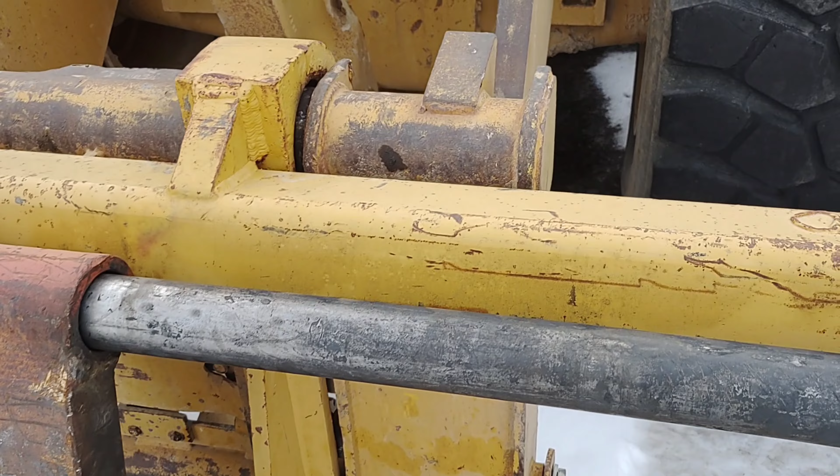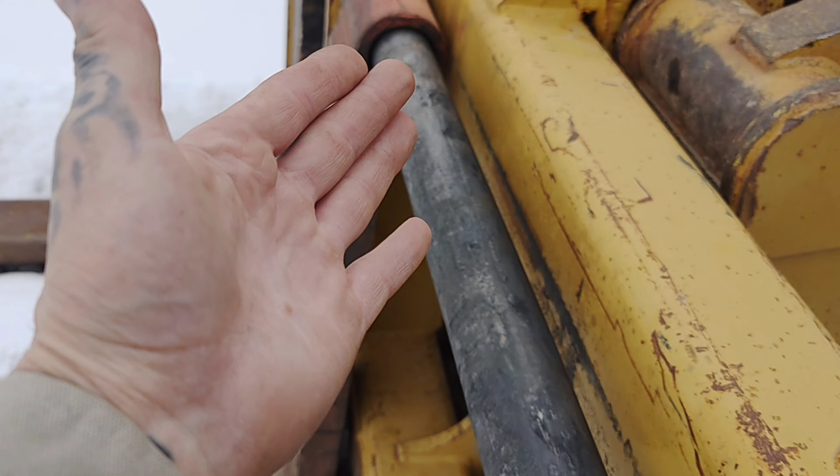Alright, next build up. We're going to do some forks like this, for something like this. So we're going to have to build ourselves a little notch like this - a bracket, cradle, something like this. Something that goes down like this and has locking pins in it.

So I'm just over here to get a good idea on this piece of equipment, to see how I'm going to build it. It's massive. Just trying to capture it all. This is how I need to build it.

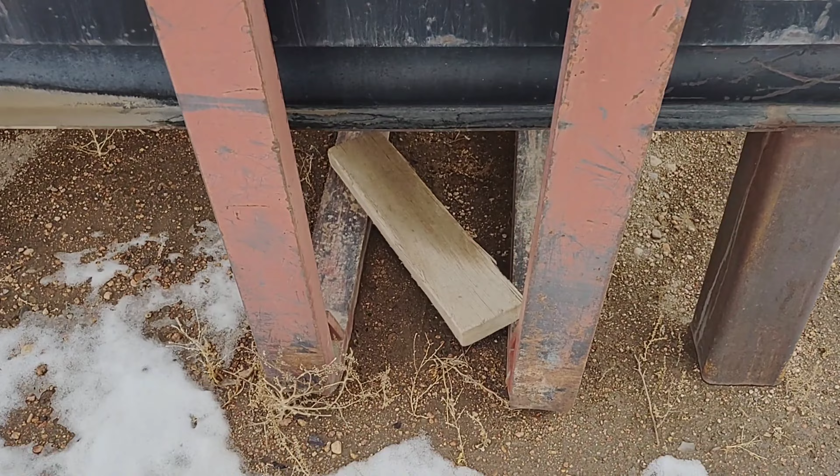Just like this. Alright, so we were going to do these big forks. We decided not to, because these are kind of made for going on a really tall bucket with a blade - I mean with a bucket, duh. But so I'm just going to steal this bar.

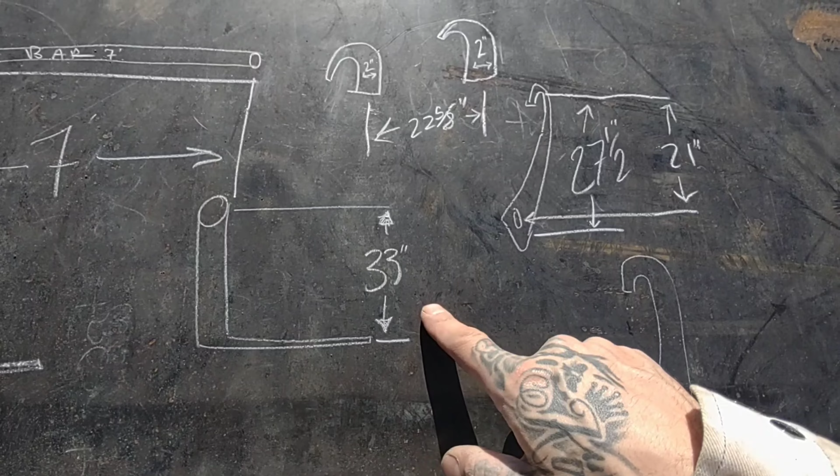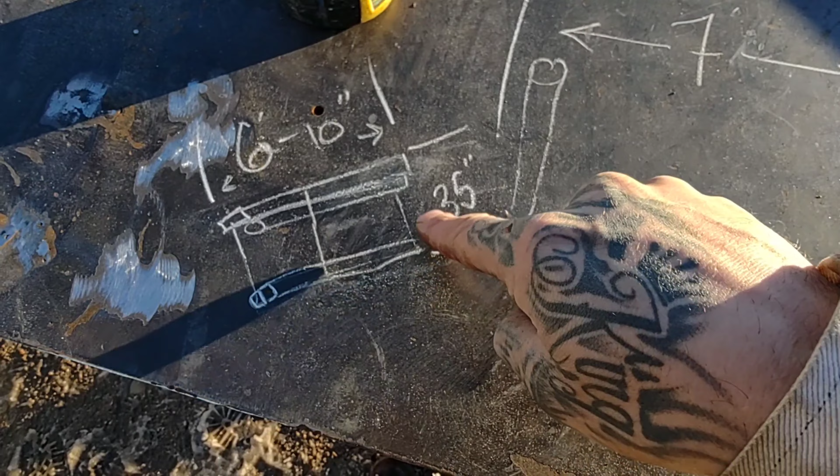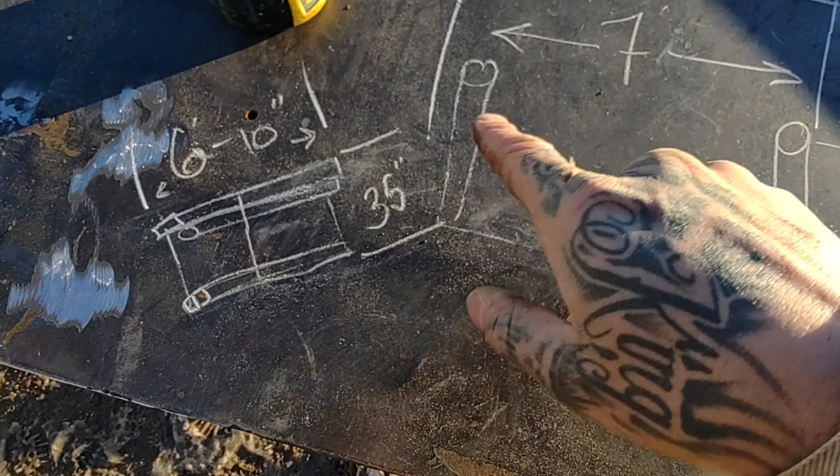Okay, so now I'm figuring out some stuff for my forks here. So I'm figuring out the actual frame that it goes into. So that'll be a square tube, and I'll have plates on the side, plate in the middle, and I'll have the forks inside of there, so that way they can slide all the way to that point. And I'll make it just under 7 foot, so that way I can get my tighteners on the outside of that bar sticking through them.

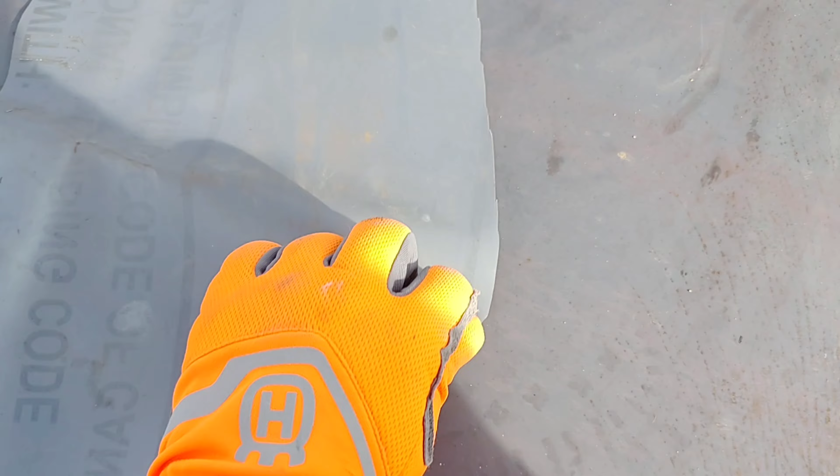And like I said, these will be plates, that'll be a plate, and then I made a custom template - so here was my template I had made, but it was just kind of to get me in the ballpark. So that's what the piece is gonna look like.

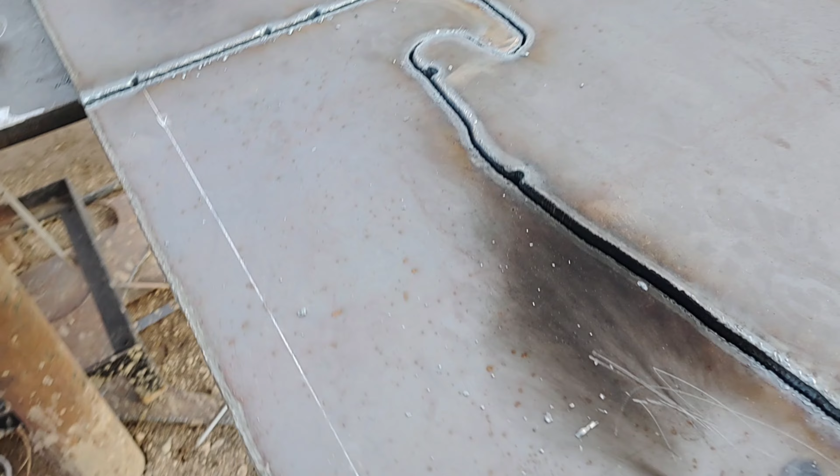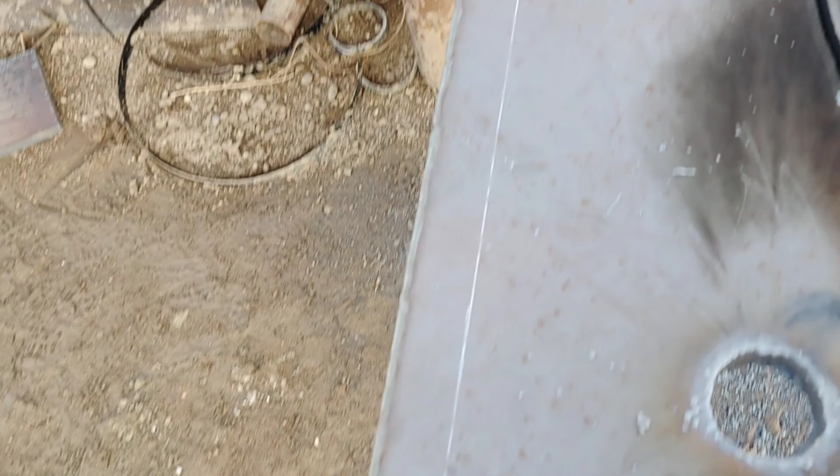1-inch plate. So I cut me this piece here, my little hole there, and that's what will attach to the forks. Tried to follow the contour of what it's going to be, and I'm undecided if I'm going to cut that 2 inches off or if I'm going to leave it long. I'm going to set it up on there and determine then.

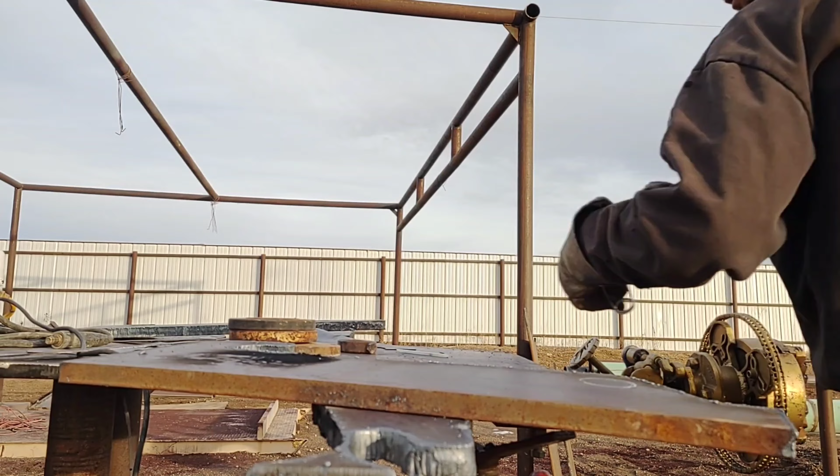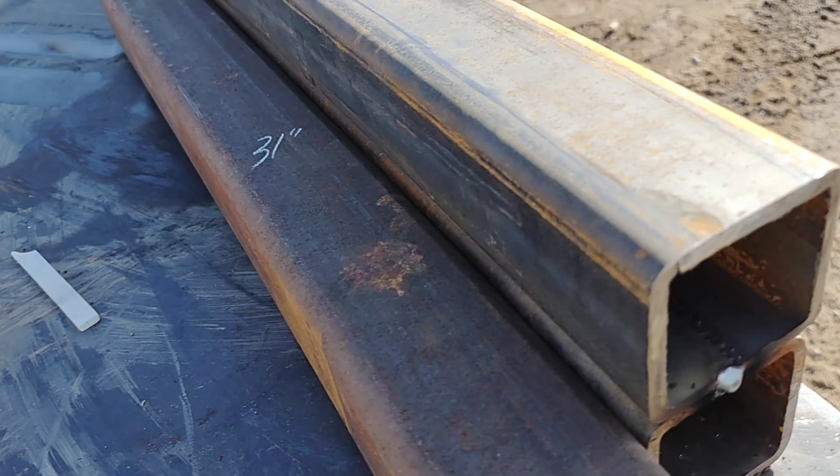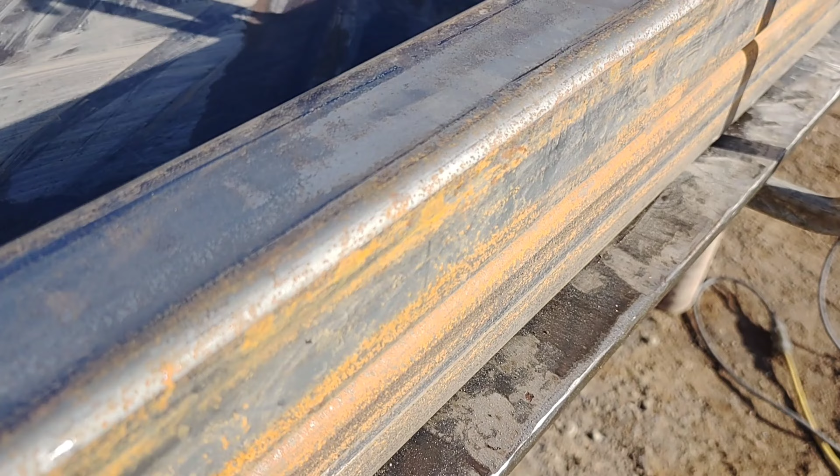What I do first is I get these 2 double bars put together, and I'll lay out a stitch and stitch these together, but I don't want them to banana quite yet, so I'll weld them a little bit later. But right now the main thing is getting them tacked together and making them flush for the side, and you'll see what I'm using it for.

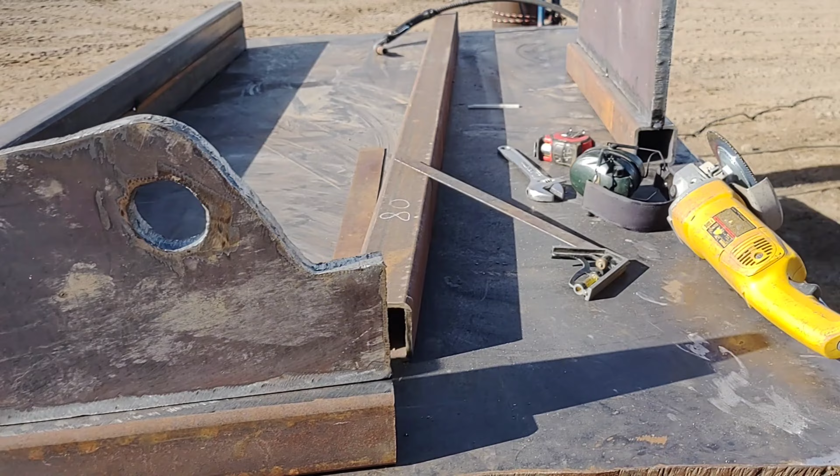I'm just working with what I got, so you'll see. Now I'm going to go ahead and just clean these up a little bit with a flapper on the top, since I'm not going to really be handling much of that when I'm done. But that's just the part that sits against the tractor equipment.

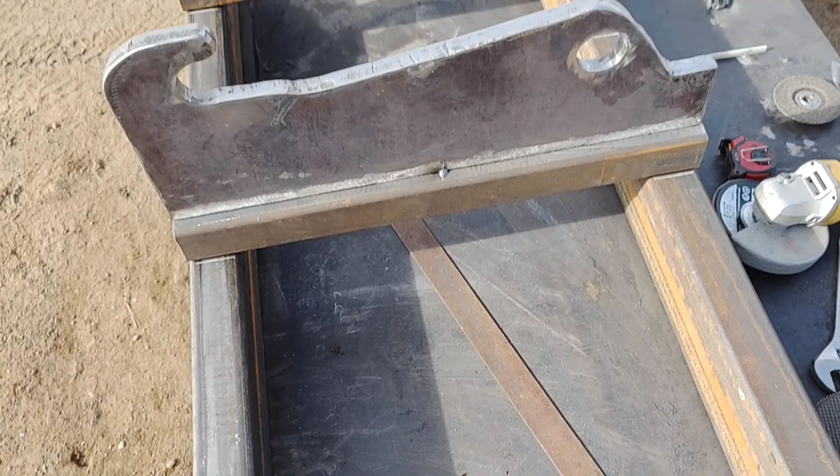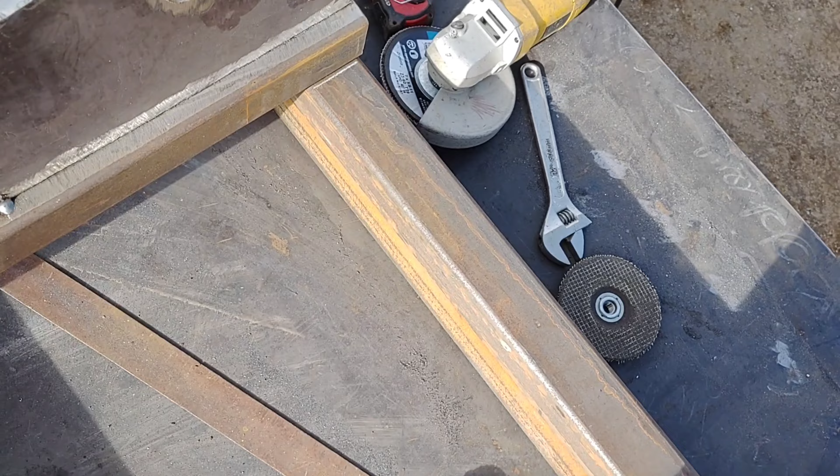Okay, so I jumped up on my table to pick those up and set those on top of it. I laid it out, so that's pretty much like the top. Now I got this double bar here, that'll stay there. That one down there will go away because I just need 1 bar on the bottom. But that's how I'll set it up. Alright, that's where I'm at right now.

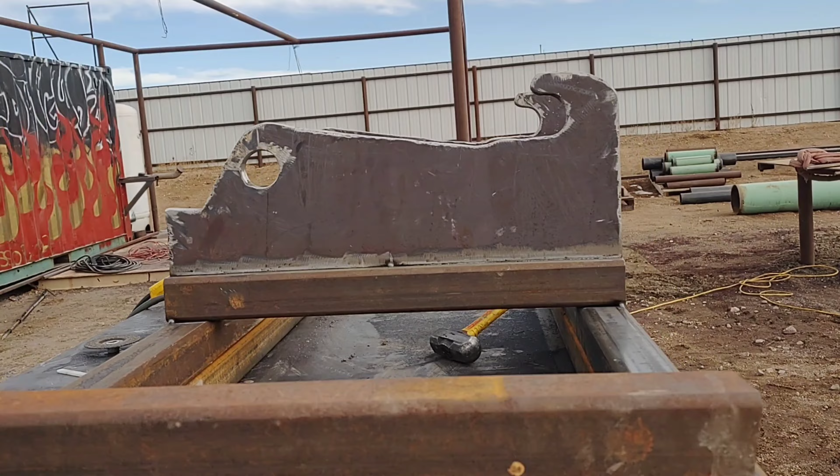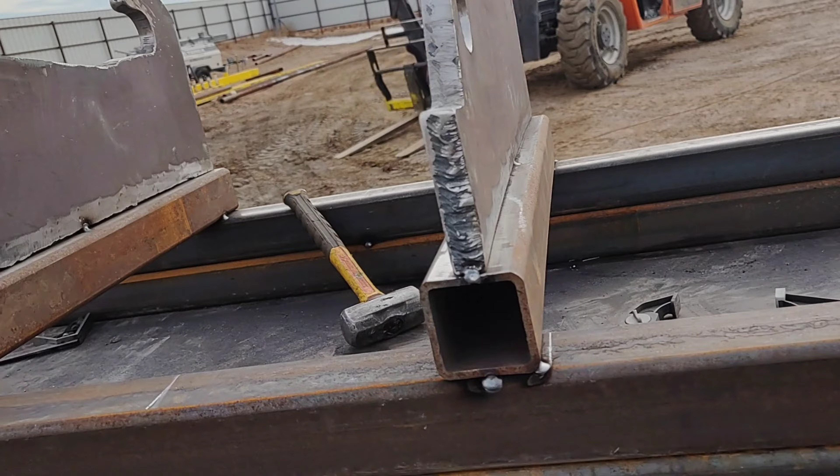Seems like it's gonna work. That's just where I'm at now. So this bar isn't gonna be here, it's gonna be here. So that way it'll be 2 bars stacked this way. So that one will stay stacked like that, and then this one will have 1 stacked here. You'll see, I'm just trying to kind of showcase it.

So a little upgrade. So I got my sidebars on here now. I had to cut these. I'll now weld these on here, and then I got a middle plate right there that'll go in here. So it's 1 inch, 1/4 inch, 3/4, 1/2 inch.

Yep, and of course I'll probably put some plates over it, and then I'll see what I'm going to do for gussets. Alright, here's another look at it.

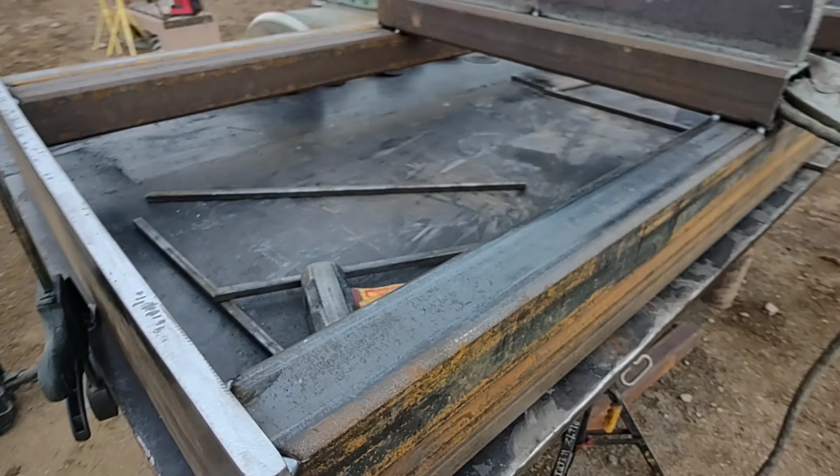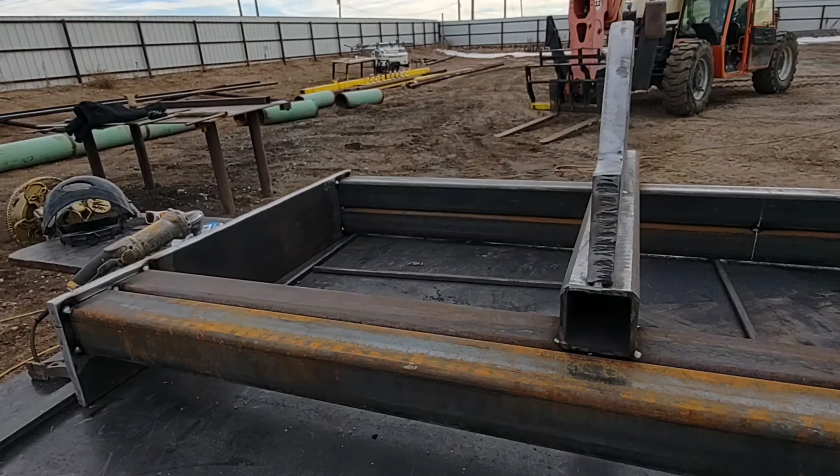I'm starting to get it all tacked off and prepped, ready to weld out. I've pulled out my double stack bars up here, my two flat ones there. Now I'm going to sink in my middle bar that separates it, and then I'll have to put a hole through all of them and then just weld it all out and slide the bar in there.

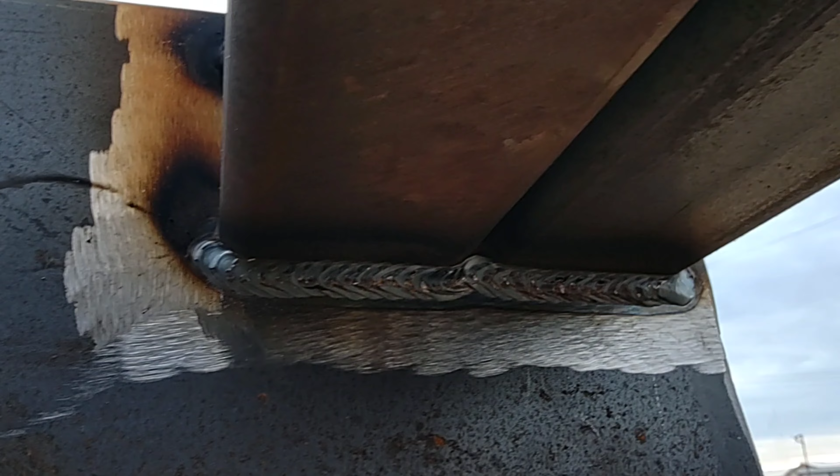Should be good. Alright, so I decided to jump up here and do the flat welds real quick, show you the flat welds, and the overhead weld, give it a little bit of style to it on that whoop-de-wham. Nothing to brag about.

But yeah, maybe on Pulse Mode I might flip it and do it flat, do that overhead, we'll see.

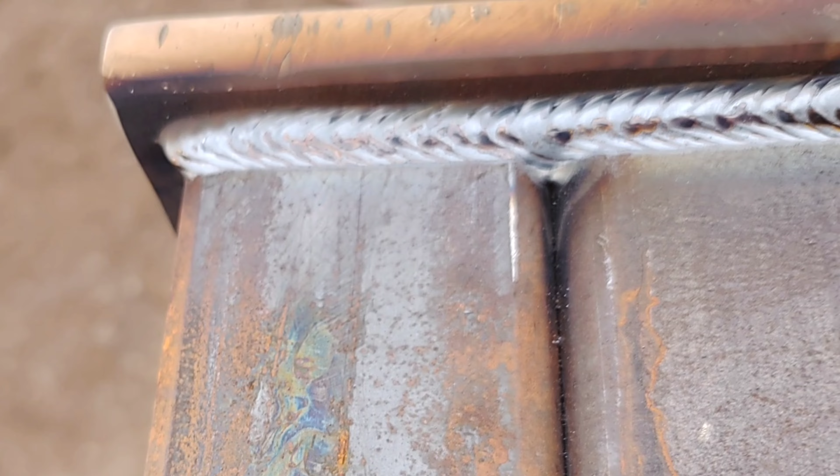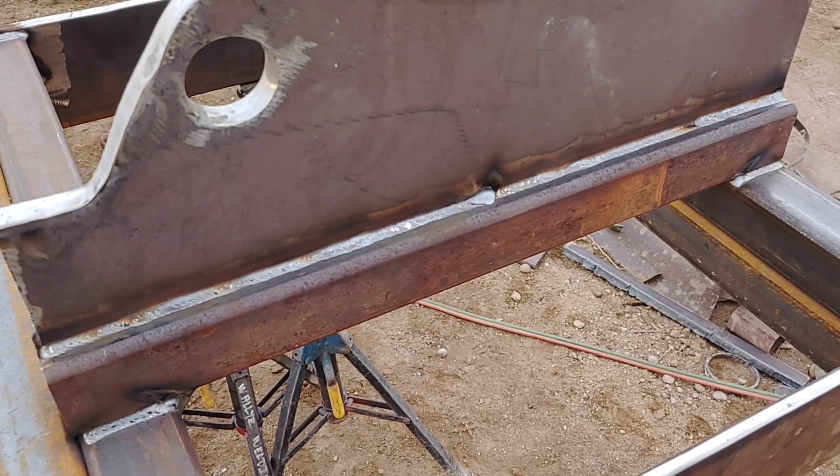Alright, here's the other side top that I just did. There's the bottom. Totally wasn't thinking about it, but started those ones in the middle. Needed to start on the end, drag it to the middle, and then finish it to the end. Oh well.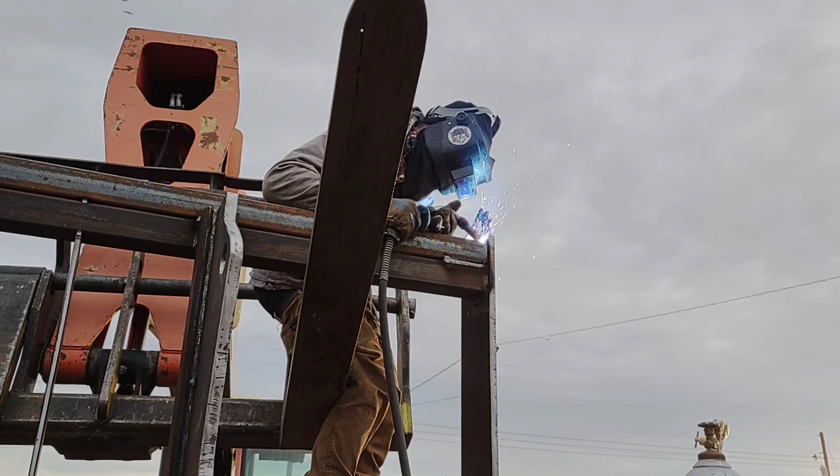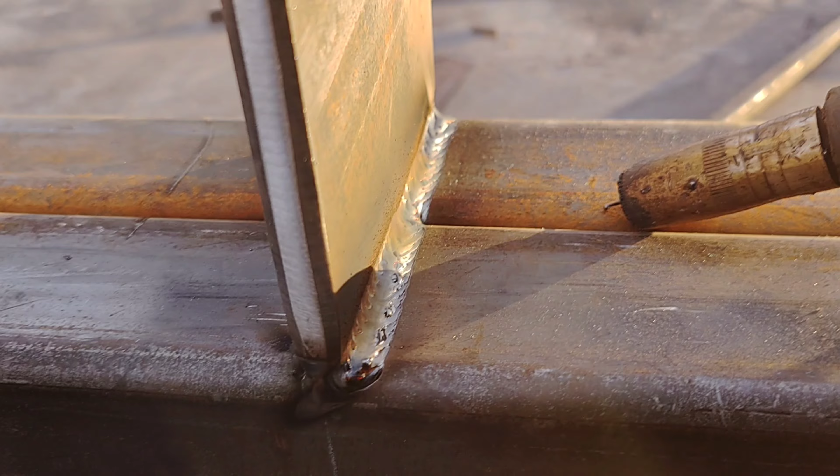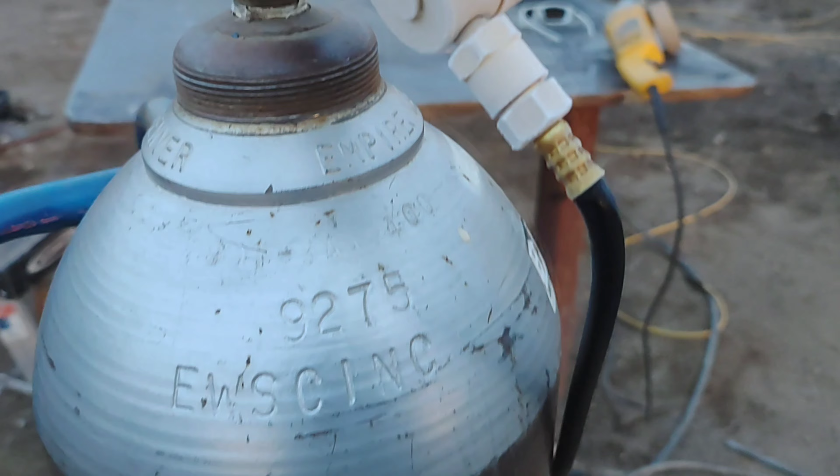Well, it definitely was pushing some gas through there. It's not argon, it's an argon gauge though. Anyways, got it all welded out now.

All I'm going to do now is just kind of round my corners off on the top. I might lay it down and put a stitch weld right there in the morning. That's it. Other than that, I'm done welding it out. It's good to go, just got to cut holes in it.

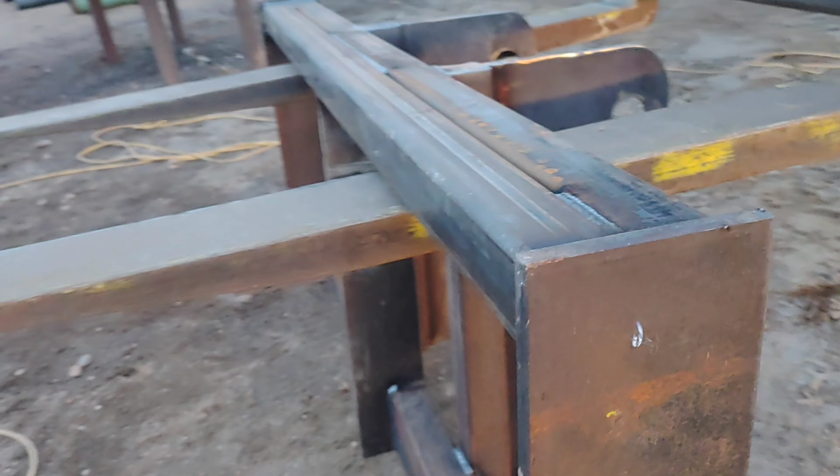Cut the holes in this plate, the middle plate, and that end plate. Slide the bar in, slide the forks on. It's ready to go.

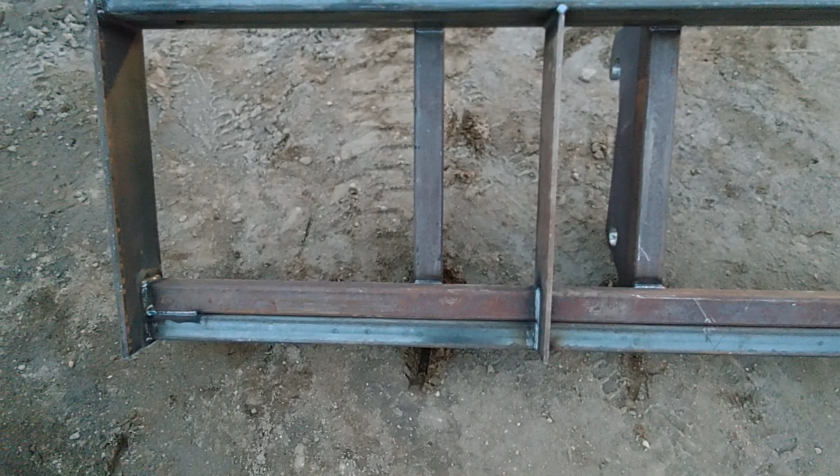Yeah, I'll definitely put a weld from there to there and a weld from there to there in the morning. And then I'll cut my hole here, cut my hole in that, cut my hole in there, slide my pin in, put my fork on, slide my pin in, put my fork on, slide them in, lock them in on the ends, and then it's ready to put on that piece of equipment. I'm not going to paint it, but maybe they'll paint it.

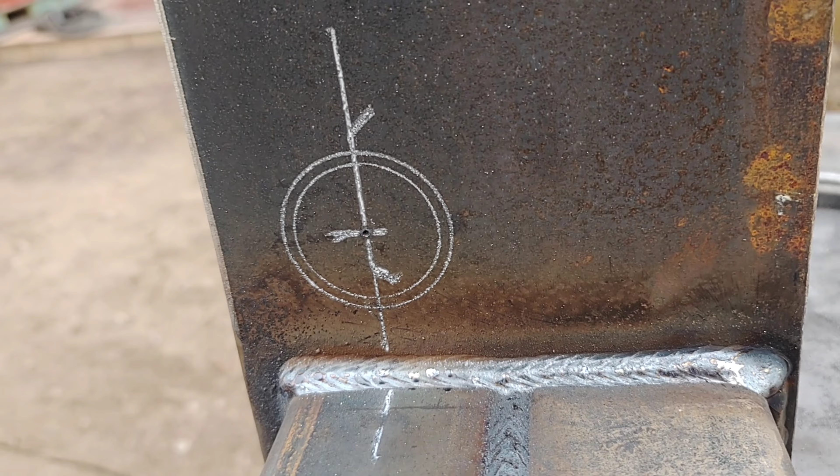Alright, last stage of the game. Laid those out. The last one I'm going to lay out real quick. Then we're going to cut our holes and then clean them up.

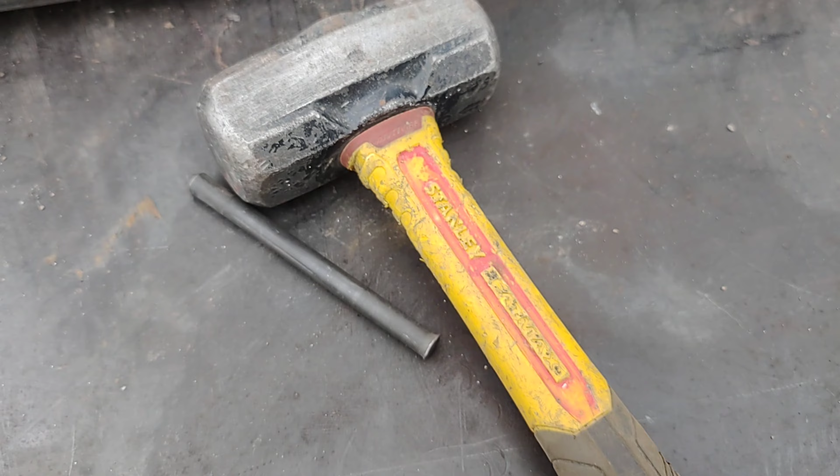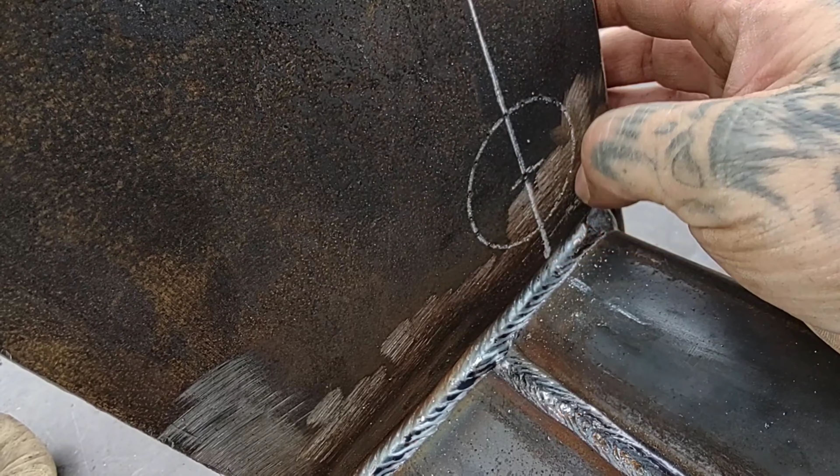And here's a little tip, you probably see it all the time. I punch it all the way around it, because you know when you fire up sometimes that smoke cloud will do that, and if you wipe it away you'll be able to see those little punches in there. So I didn't lay this side out because I laid this side out.

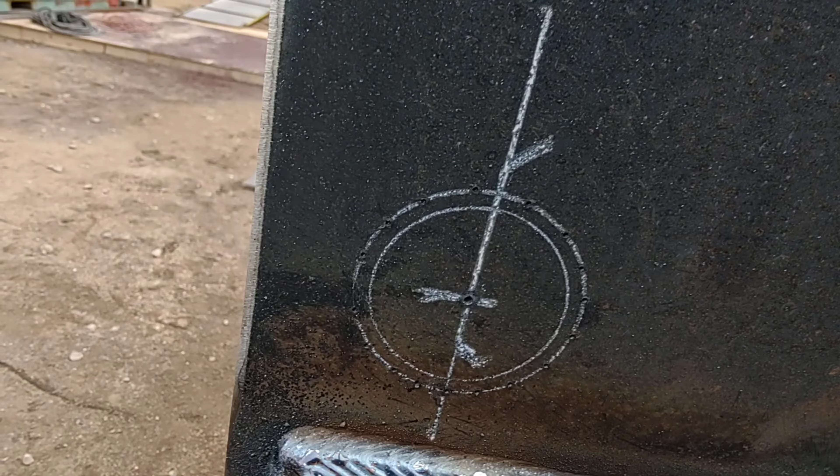As you can see, I put a bunch of little punches around my circle. Remember, it's your job, so you've got to make sure you do it right. And the way I laid it out like this, the reason I did this was so that I didn't guess. That way it was perfect this time.

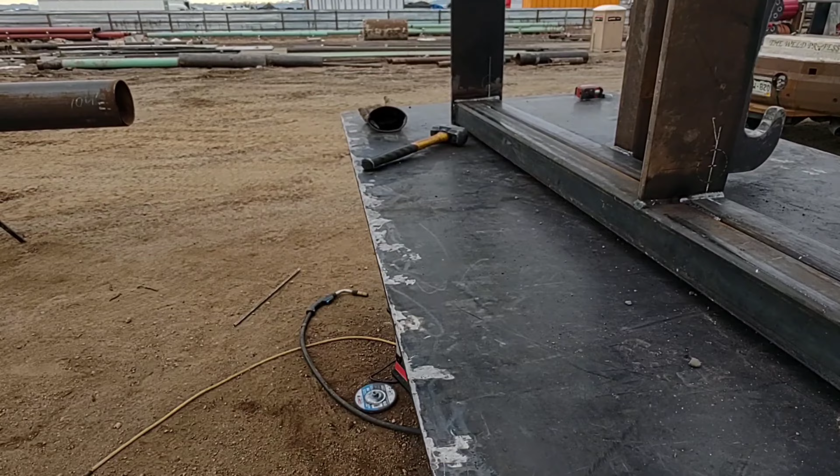Alright, so my bar fit through my first time. Looks like my holes lined up, just barely. So here we are to the final stages.

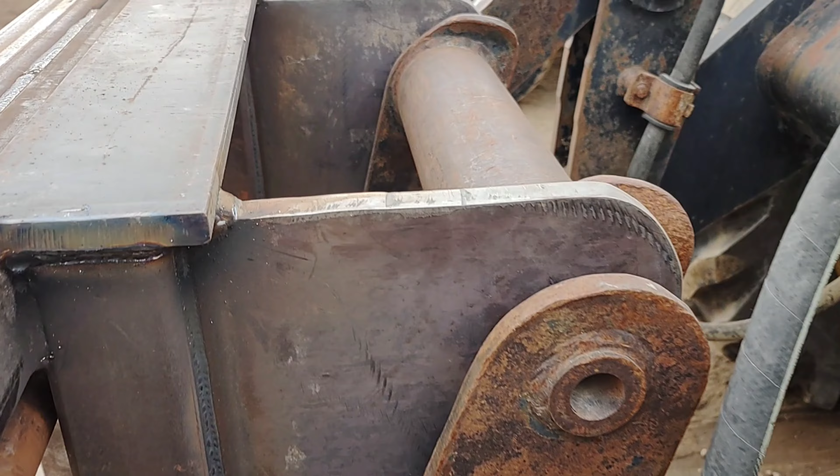I put it on, man, it fit good. First try, it slapped in there. The pin's locked, it's got pins that lock. It's got lots of clearance. It's sturdy, it ain't going nowhere.

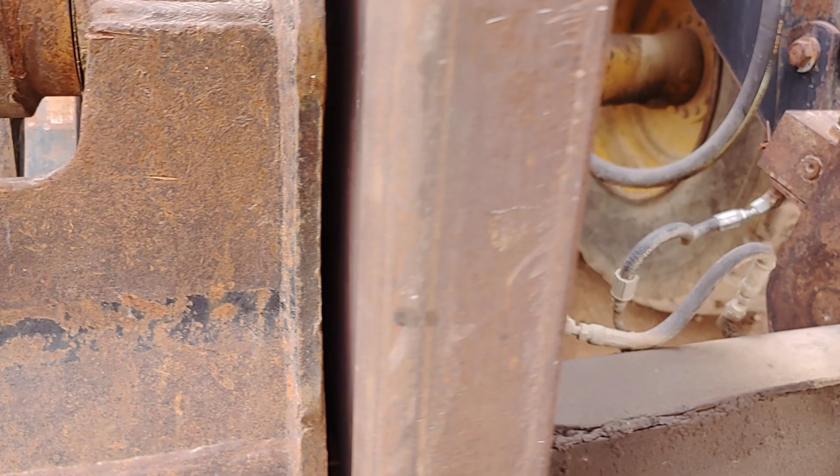Now it's time to put the forks on it. Call it done, that's what it was for.

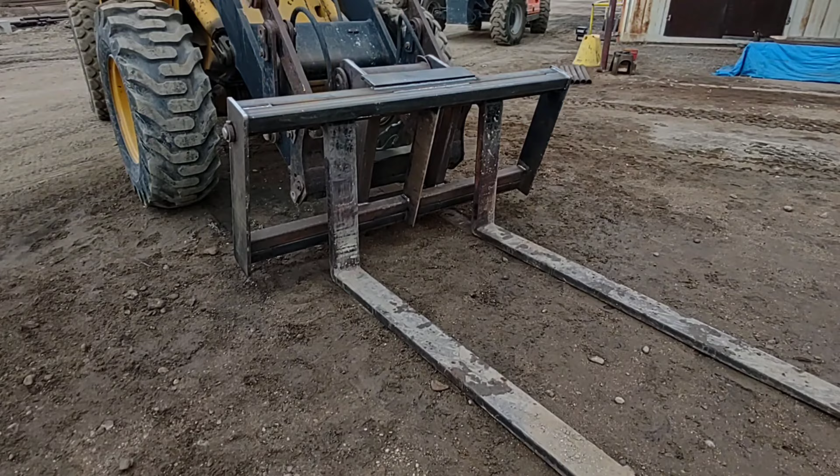Yep, alright, put the forks on. Got the little tighteners on the side. It's ready to pick up now and go home to its customer.

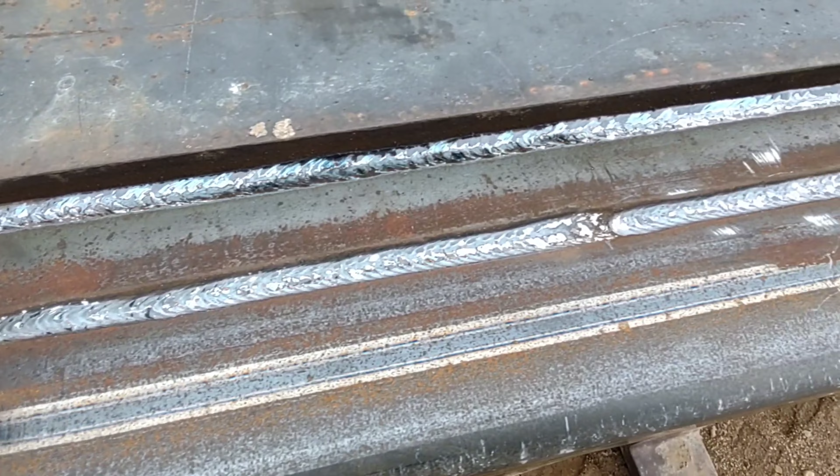Just a bunch of wire welding. I'm going to wire wheel it.

Bunch of welding. Looks good.

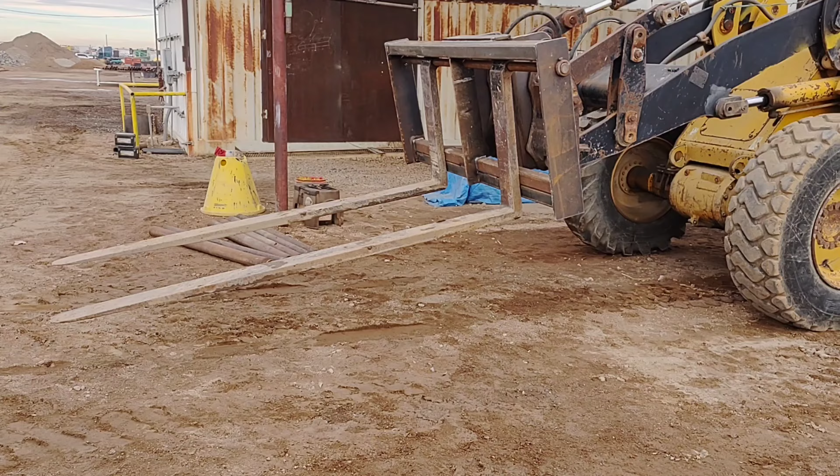My fork's in action here. Finally got Pablo over here.

Yeah, so they're gonna work good.